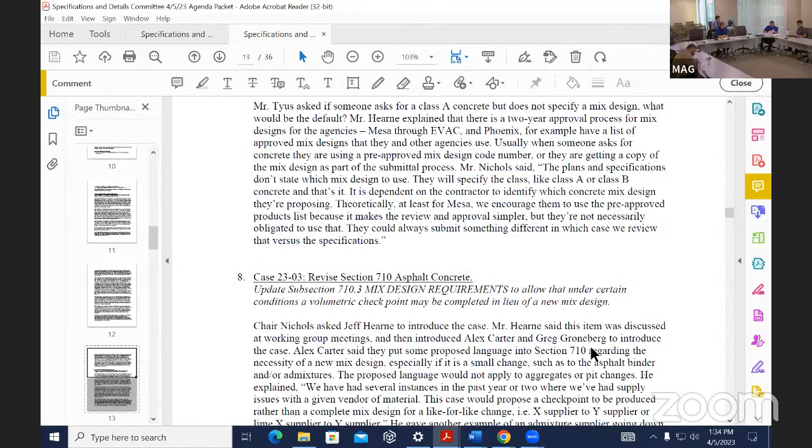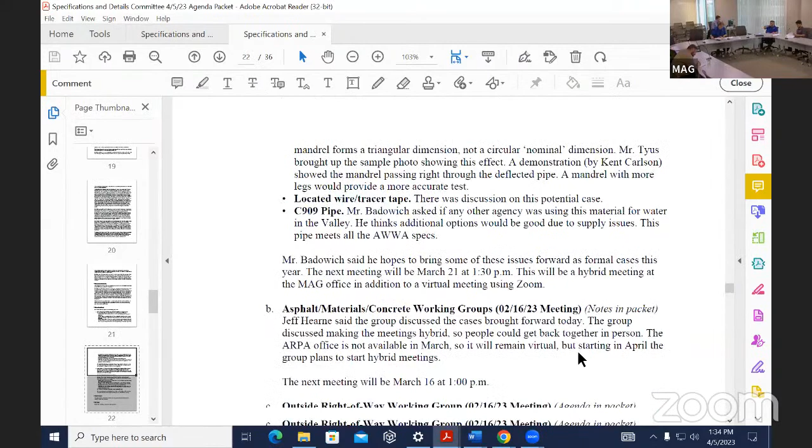We'll move on to agenda item number 3, the approval of the March 1st, 2023 meeting minutes. We can go ahead and scroll through those. And if anyone has any comments or modifications, after we get through those, we'll go ahead and discuss those. Otherwise, we'll entertain a motion on those minutes. We're very long this month, so it's going to be a long time scrolling. Okay, and of course, we didn't expect everyone to read those as we scrolled through them. Hopefully everyone had a chance to review those previously. Is there anyone with any questions or comments on the meeting minutes, or otherwise we'll have a motion for the minutes?

Okay, hearing no comments, is there anyone that would like to make a motion? Ryan, I'll motion for approval. Okay, thank you, Craig. Is there a second? Second. This is Roy. I'll second. Thank you. We'll go ahead and do a roll call vote on the minutes now. This is the minutes for March 1st, 2023.

Avondale. Is Avondale on yet? Buckeye, Buckeye's a yes. Chandler, yes. El Mirage, yes. Gilbert, that one is gone. That was canceled. Yeah, that's canceled. Gilbert, yes. Glendale, yes. Goodyear. It's good you're on. Maricopa County, yes. Mesa, yes. Peoria,

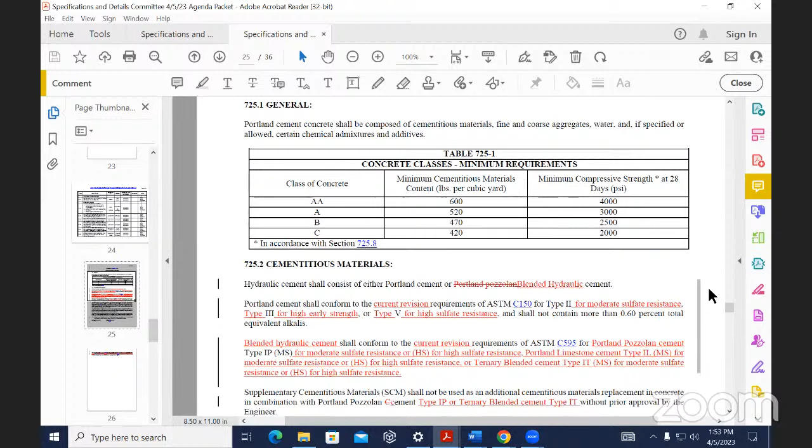Jeff, I've got a clarifying question for you. This last paragraph references C150 Portland cement of any type, or C595 type IL blended limestone cement. When those two types of cement are used, we're saying that up to 25% by weight of the minimum amount of cementitious material in the table may be fly ash, right? So 25% of that minimum cement material is allowed to be fly ash. That's correct so far, right?

Yes, and Ryan, that's the way it's been in 725 for a long time. Right. It's always been that way using C150 cements. We're just adding the 1L. We didn't add in the 1P, right? Correct. Because that has the fly ash.

So the way I read the second sentence, additional pozzolanic material, supplemental cementitious material in excess of the minimum Table 725-1 requirements may be incorporated into any concrete. So is there a restriction then on the amount of fly ash in the type 1P cement? Understanding it's potentially got some built in already, should that also not exceed 25% by weight, or does it not matter for that type? Right now, as written, with the first or second type you can only go up to 25% fly ash. With the third type, there's no restriction.

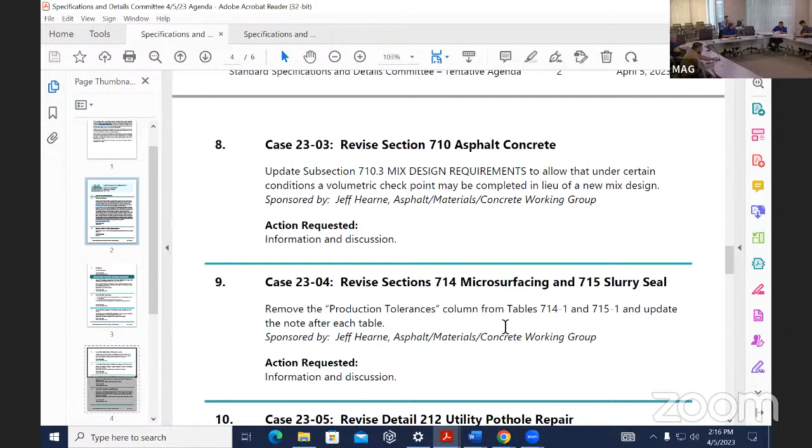We'll go ahead and move on to agenda item 8, case 23-03, revise section 710 asphalt concrete. This is to update subsection 710.3 mix design requirements to allow that under certain conditions, a volumetric checkpoint may be completed in lieu of a new mix design. Again, sponsored by Jeff and Alex. Are you going to speak on this one, or is Jeff going to take this? No, I'm turning it right to Alex.

Alex, you're on, buddy. Yeah, we presented this during the last working group for comment. It seemed well received. I have not received any comments or proposals for change in language. Jeff, have you received anything else by chance? No, not at all. I would turn it right to you if I did, Alex. Okay. So at this point, we're just seeking any comments or issues anybody sees with this change. We talked about it during the last meeting in depth.

I'll just add my thought here. I did reach out to the City of Mesa Materials Lab on all of these materials cases, actually, and I received very positive feedback for each of these cases, and they had no comments or concerns with any of the cases, including this one. So I think it's a good move in the right direction. Excellent. I appreciate that feedback. Thank you. Any questions from the committee or comments?

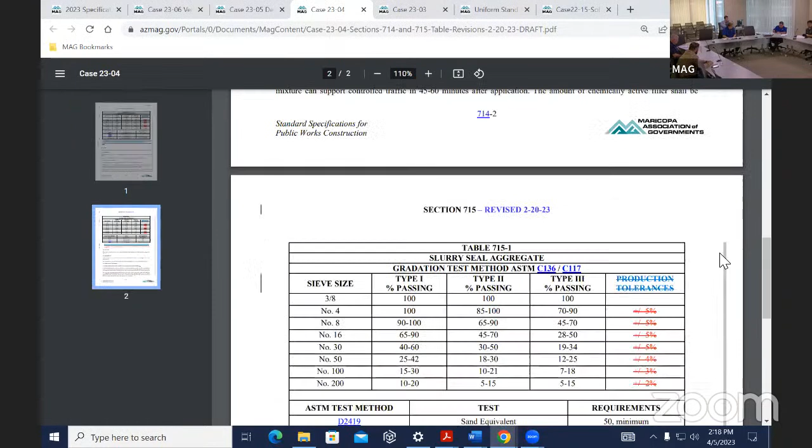Okay, hearing none, we'll go ahead and move on to our next agenda item then, which is case 23-05, detail 212, utility pothole repair. Removing ABC as a final backfill option for potholes and strike note 2, native soil for temporary potholes. Arvid. Thank you, sir.

So you've got the language that we submitted last month. We got some feedback from Warren's group. We responded to them in kind to reiterate what the purpose of this updating is for. Specifically it has to do with the backfill of the pothole when the pothole needs to be finally backfilled permanently. We cannot get compaction testing on potholes because a typical pothole is 10 to 18 inches and there's no way to get down in there and compaction test ABC.

So the working group decided it was best just to go with what the industry is typically doing right now, which is doing the half sack CLSM for final backfill. The native or the temporary backfill is an agency by agency decision. Certain agencies are allowing us to backfill with native and cold patch, knowing that that pothole has to be reopened many times to verify existing clearances between a trenchless installation and the utility. And we don't want to be going through CLSM every time. So we're using native and cold patch.

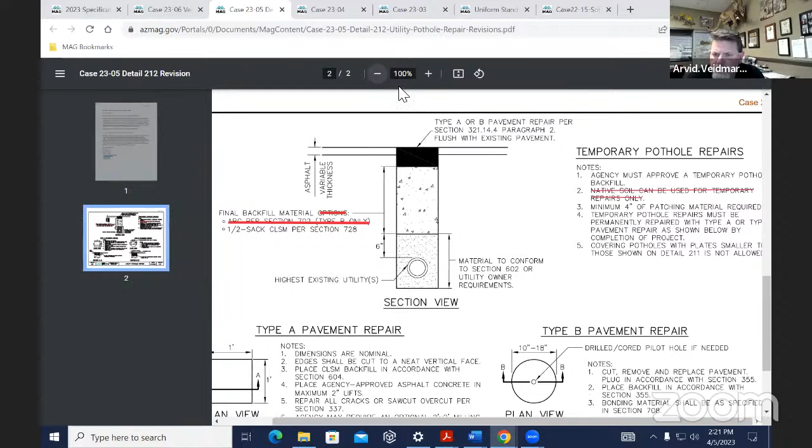We have the verbiage on the detail, and Gordon, if you can jump to the detail, you'll see that it makes the final backfill the half sack, and then under the temporary pothole repairs, agency must approve a temporary, hold on a second, I gotta move my camera, a temporary pothole backfill. Depending on what the circumstance is for the agency to be issuing the permit for that pothole to begin with. And this is primarily targeted towards the design potholing that takes place with all agencies in the preparation for a project eventually coming out to be built.

Or, we'll just use Southwest Gas as an example. Southwest Gas is going in and replacing a 4-mile gas system, and they need to find an alignment. And in doing so, they want to fill all those design potholes with CLSM because they don't know if they'll be using that alignment in 9 months or not. And we don't want to be leaving those design potholes temporary filled. We want them to be filled with CLSM, and then either have the coupon reinstated or do the hot patch pothole. So that's the overview.

And did I hear correctly? So you had these changes proposed at the last meeting. There haven't been any specific updates. You said there were some questions that you addressed, but that didn't result in any changes. There was a couple questions from Warren's team. Again, I'll read it to you. It says, if we're removing the native option for temporary pothole backfill, is there an acceptable default material option to be used instead, and possibly add note 1, unless otherwise specified by the agency?

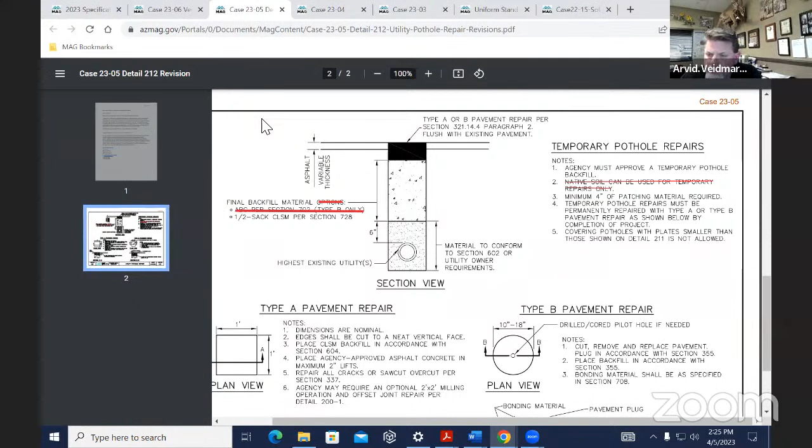Okay. Thank you. You're welcome. Any questions or comments? Okay, we'll move on. Thank you very much. Thank you.

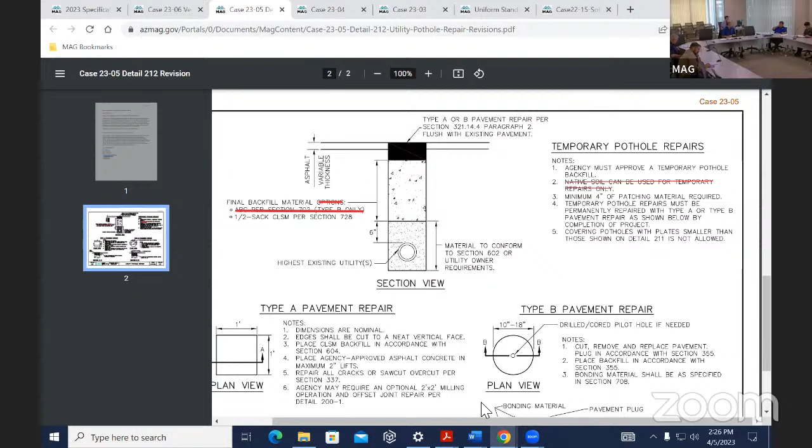I'm sorry, Mr. Chairman, I don't know how much longer we want to let this roll out there, but I think typically we give it a couple of meetings before we ask for a vote. Is that correct? We do. Yeah, I think it may be just a little bit premature. We try to get some voting done before we get to the last month when possible. So some of these cases that we haven't had comments on, I'd like to at least wait until next month and see if there's any final feedback. And if not, then maybe we start targeting a vote in June on some of these. Thank you.

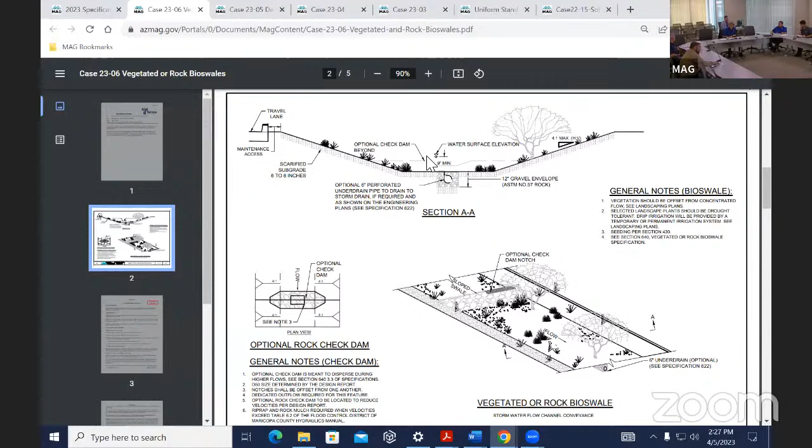Okay, very good. We'll go ahead and move on to agenda item 11, case 23-06, vegetated or rock bioswales. Proposed new bioswale detail and related specifications. And I'll just cut it short with my explanation on that and turn the time over. Is Bashir on now? No? Okay. Peter, you're also involved on this case? Yes, and I have to apologize. I got some comment. I did some revisions to be demonstrative on some of this stuff. Did you get those, Gordon? I emailed them a little while ago before I drove up here.

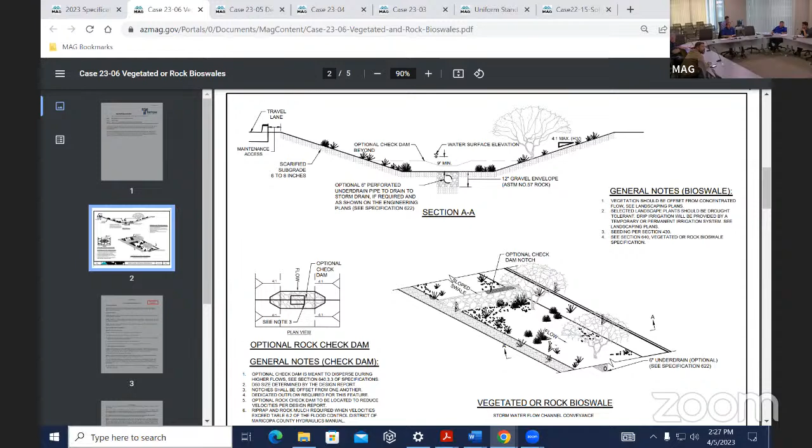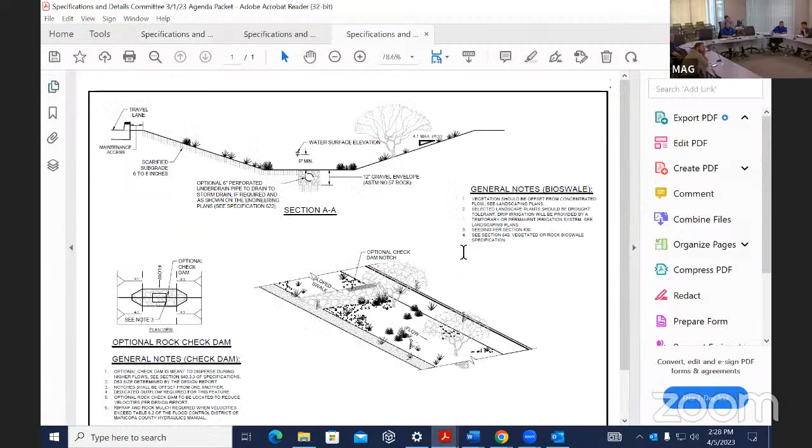Okay, so you don't have the email. So see if you can access that. That's my inability to get stuff done, because what we wanted to do is just go through some of the items that were brought up last time in terms of concept. This is our trial run one that's really pretty much outside of the existing Blue Book. So within that, there should be two emails from me. Yeah, there we go. So we can open that one up. And what I did was mark up one, and again, this was also a request by Eric. He wanted to see kind of a red line of what was talked about last week.

I wanted to show, at least conceptually, how we could make this look different, so you could differentiate between MAG specification versus the supplemental document, finally just calling it MAG supplements. So at the very bottom, I started putting just initials. And we can talk about that in the update of the working group. But I started adding just letters MS right now in front, just to give some kind of differentiation. And then getting rid of the word standard because of the discussions last time and going to the word supplemental, or supplemental specification or supplemental detail, as opposed to trying to identify this as the MAG standards. These are supplemental specifications and details.

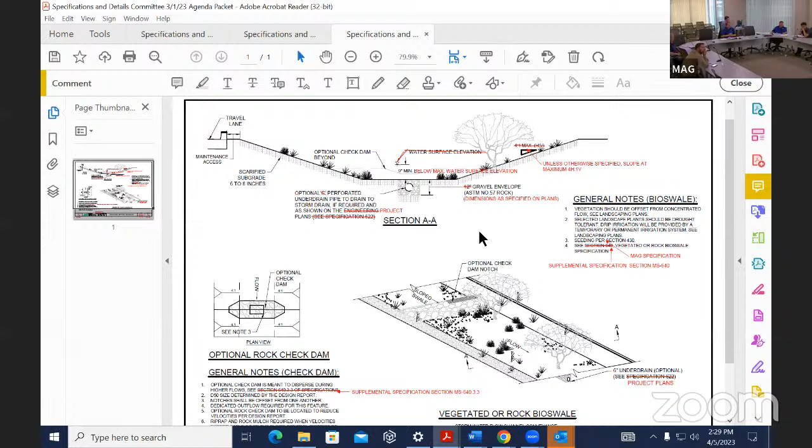So within that, I started just marking this up to show how that could potentially look on this one as our example case. So you can see where it's referencing an existing MAG, for example, it would actually say MAG specification section blank. That would be the notes under general notes. Maybe blow that up a little to the right side of the general notes section. Yeah, so this is one way I was thinking we could do that. So we've got seeding per MAG specification section 430. That would be very clear mentioning that.

If it's referencing a supplemental specification, it would say see supplemental specification section. And again, I'm using the letters MS because we haven't decided yet. MS 640 for vegetated bioswales. So starting to show that difference between those. And internally within this, I wanted to get that out to see where those changes could be done, see what kind of reaction, is that something that's more meeting what the committee would like to see as we bring these kinds of specifications forward.

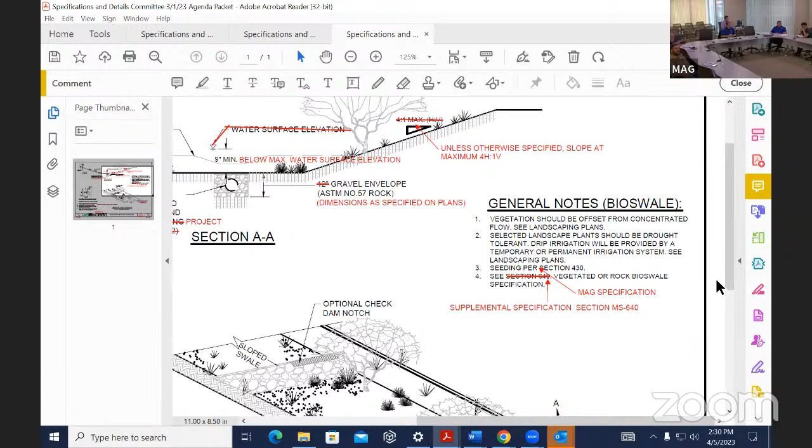I started making some other changes based on the notes and Eric's going to deal with those, but that's the real thing I wanted to bring up now. And the same thing on the standards themselves, the details. So, we could bring up a Word document. One of the two Word documents will work. Yeah, it's as good as either of them.

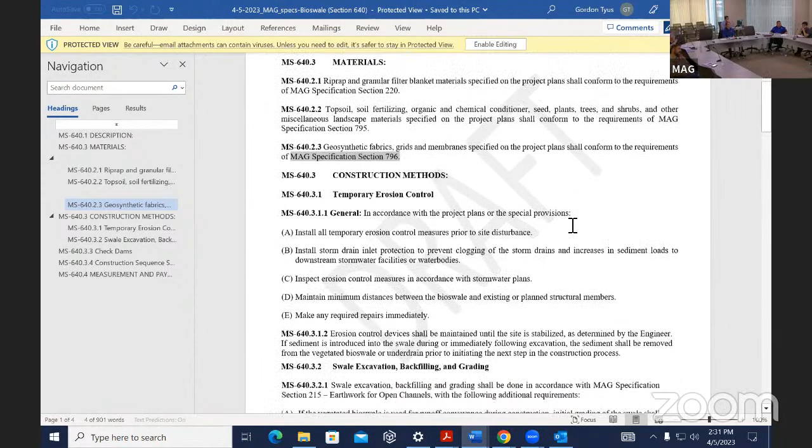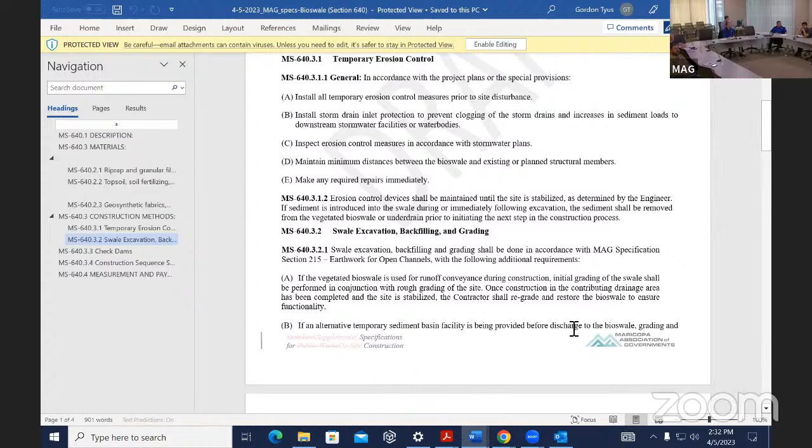At the bottom of the page, I even changed the heading a little, the bottom saying supplemental specifications. And this is that idea of public works or on-site construction. Trying to come up with this language difference so we don't mix the two up. So you see, it definitely looks different than a MAG specification. And again, it goes through the rest of it. I didn't want to change too much.

Again, you can see the words MAG specification, or if it's a supplement, it would actually have that. So I'm kind of throwing that out as a way to start developing these and making them look different. So I'm looking for some feedback, especially on that. I don't think we received any detailed feedback other than the discussion we had last time, which Eric is still incorporating. But we need to come up with format as much as anything else. So looking for feedback on it.

Peter, the one thing that pops out to me is when we start putting supplemental in there, some of the other cities have their supplements. Could there be a chance we could start confusing the City of Avondale supplements with the supplements for MAG? So part of the idea was always keep the word MAG in front of it, MAG supplemental specification, as opposed to City of Tempe or City of Mesa and so on. And that was the hope, that we'd always keep the acronym MAG in front of the supplemental word. Okay, which identifies where it's actually coming from. Yes. I think that's a great question and comment.

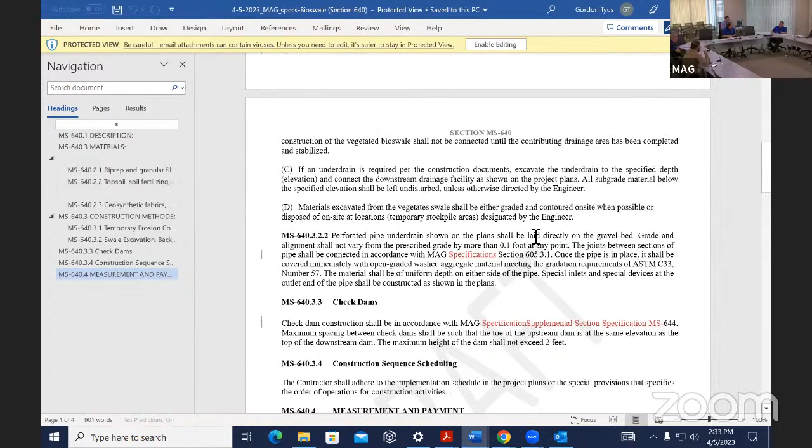And I think I had sent an email with a whole slew of thoughts on wording. Did that go to Eric and Basher? I don't remember who I sent it to. Okay, I'll have to look. It was on my emails a month ago, but I do like that. I'm kind of reiterating, I think I made these comments in the last meeting as well, but I personally think we want to avoid using the word standard for these documents. And so I think that's a move in the right direction.

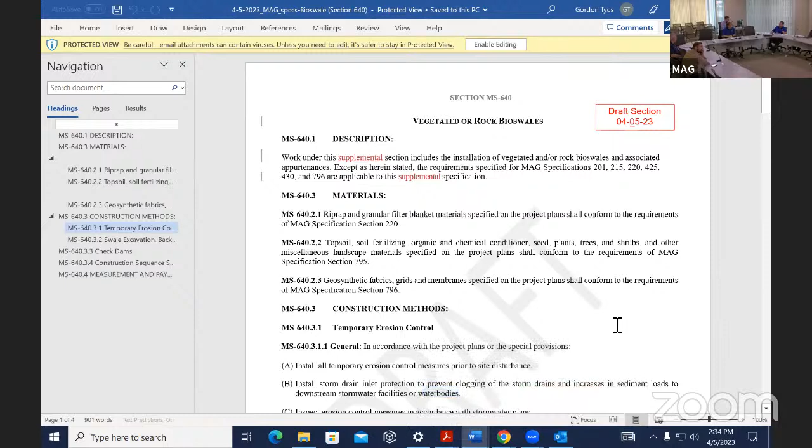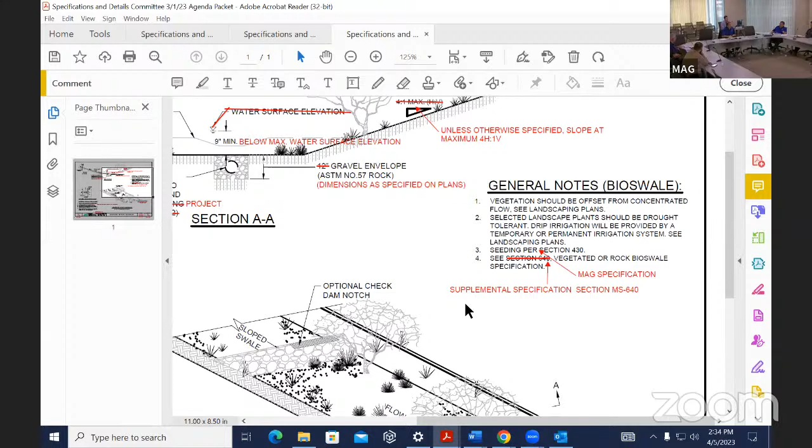Meaning standard details and standard specifications have always referenced the right-of-way document. Correct. And so I want to avoid using the word standard details or standard specifications for these. And also part of that stems from the idea that perhaps some of these details that are being generated are more of an example detail as opposed to a standard detail or a typical detail, or there's some variability to them that exists inherently as opposed to the standard details, which are pretty well standardized for that particular item.

Like the bioswale, the depth may vary, the width may vary, the rock material may vary, everything about it may vary. So it's not a standard detail as much as it is a common detail or typical or sample kind of detail. A guideline. A guideline, right. So we'll get those comments incorporated for the next one.

Eric had asked me, and I really couldn't get around to it until literally this morning. Yeah. I'm trying to deal with that. So I'll get him red lines. I'll incorporate the City of Mesa comments within that also. And those were just on form. I don't have an answer for you. I had a lot of thoughts, and they were suggestions also, but I think this moves in the direction that I was thinking myself.

Yeah, and during the working group meeting, I also emailed, you'll have a second email from me, Gordon, that has some revisions to the draft foreword that talks about similar language like that and some of the intents we talked about. We can talk about that more. So I wanted to get this out right now, and then again, Eric, the city deputy, will be able to make some of the more detailed changes for the next meeting as we're going through. But we got to start figuring out the format.

Okay, let's have some feedback from the committee. Peter, I don't want to throw a complete wrench into this, but here's a thought. Instead of supplement, I mean, these have been, for as long as I've been coming here, outside of right of way; you've been working on this for many years. Could we look at possibly, instead of a standard detail, call it an outside of right of way detail? And maybe put that in the definitions at the beginning of the document as an OROW? And again, I think we need to talk about how we want to do the acronym in front.

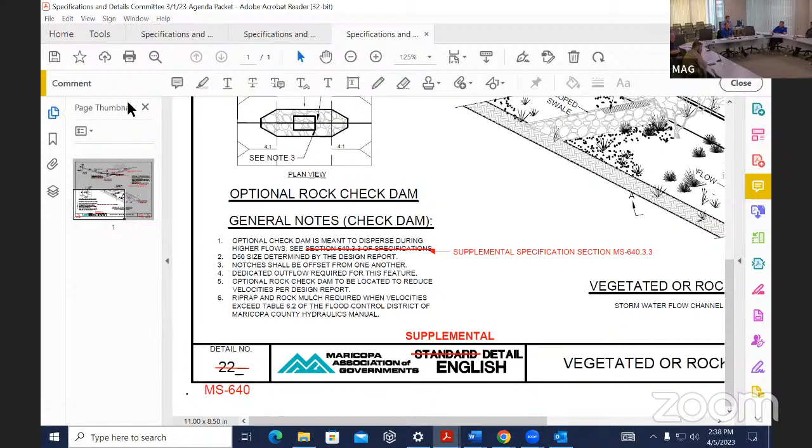What about instead of outside of right of way, just calling it a non-right of way detail? Kind of an NROW. I don't know. If it's not in the right of way, it's non-right of way. That could mean private, on-site. Yeah, the on-site, like I said, in our world could get a little confusing. I agree. Why don't you think about it? We'll discuss in a few minutes when we get to the discussion for the working group, because it's going to come up again. But again, I wanted this out there as we get these ideas. This is great. We're going to have some more cases coming up, so we got to get on top of this fairly quick. Thank you.

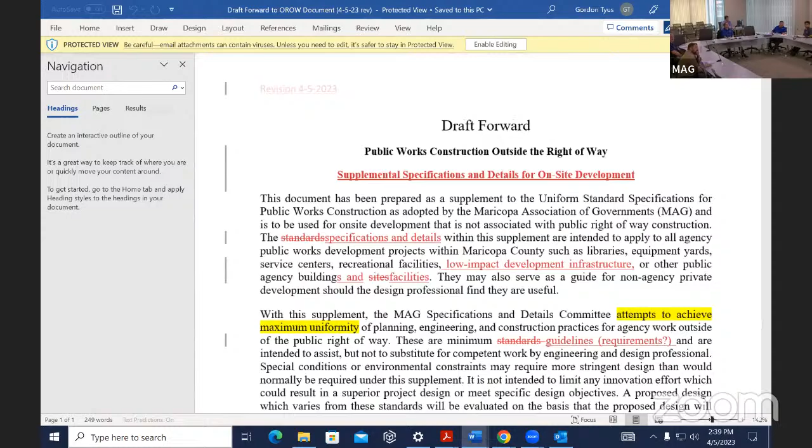I think we're already talking about this now. If there's other feedback or comments, we might as well hear them now. Yeah, if we want to just jump into that, there's the first email I sent you earlier that's got the revision to the draft foreword, and it's a bit more concise in terms of the wording. There it is. Yeah, open that one up. So based on the conversations last time, I kept the top one, public works construction outside the right of way. And then I added the other line we talked about, which I don't know if we need both, supplemental specifications and details for on-site development. Maybe there's a blend of these two for the final title.

Language changed in there, as we said, was get rid of the word standard. We'll call them specifications and details within this supplement, intended to apply to all agency work. I added the low impact development infrastructure because it seems like a lot of these are going to be directly related to that, and changed building sites to just buildings and facilities, trying to make it more uniform. Warren had asked last time to make sure there's an emphasis on the purpose, or the intent, being uniformity.

I highlighted that because we did have that in there. I'm not sure if maybe we want to have something more strongly worded or bring it farther up. And then that term of standards versus, and you can see the words guidelines, requirements, a selection of language in there with that same intent of not trying to establish these as a standard. One of those two words, maybe requirements is too strong, maybe guidelines is too soft, but at least there's some language we can look at there.

So the intent is to try to get it toward those things. This is going to lead into all of the standards no matter what, either specification or detail. It's going to be our preface to the whole thing. So again, Gordon, you'll be able to get that out now that I was very, very tardy on getting it to everybody. Yeah, after the meeting, I'll post these documents to the meeting webpage.

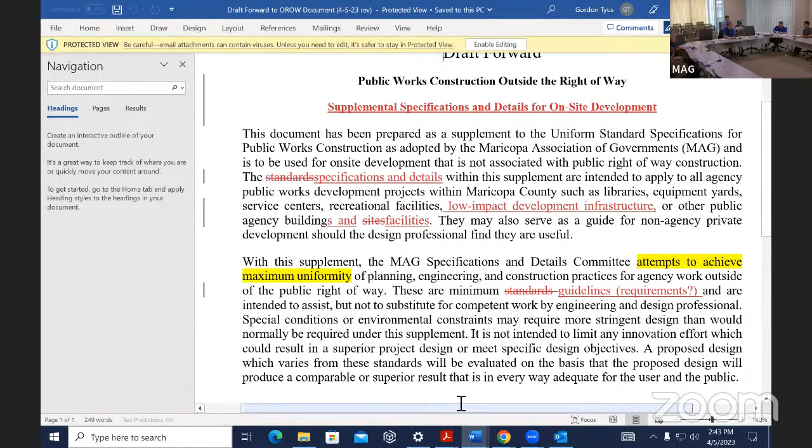Okay, so Gordon indicated he'll get this information posted for everyone to review in more detail, and we'll have an opportunity to come back in the next meetings or working group meetings and provide some good feedback and hopefully start moving this into a direction where we can implement it. Yeah, because at the next MAG meeting, we're going to be introducing another case. So as these start moving forward, we're getting on the front end of it this way. Thank you. Okay, any final questions or comments specifically on case 2306, the vegetated or rock bioswales?

Okay, we'll move to agenda item 12, potential new cases for 2023. There was one in the agenda packet on section 610. Is there someone that wants to speak to that one? This is one that Warren White sent me earlier this month as a possible change. I don't know, Rachel, if he clued you in on it at all. The only thing I know is what he sent me and what you see here. I've received that same email. He said if there's any questions about it, feel free to email him, or I can pass on my meeting notes to him.

Okay, and that's fine. It's not a case for this particular month, so it's listed under our potential future cases. So we'll look forward to having Warren potentially introduce this as a case. It looks like it has to do with gaskets on water lines. So we'll look forward to that in the future. Are there any other potential new cases that committee members would like to discuss at this time?

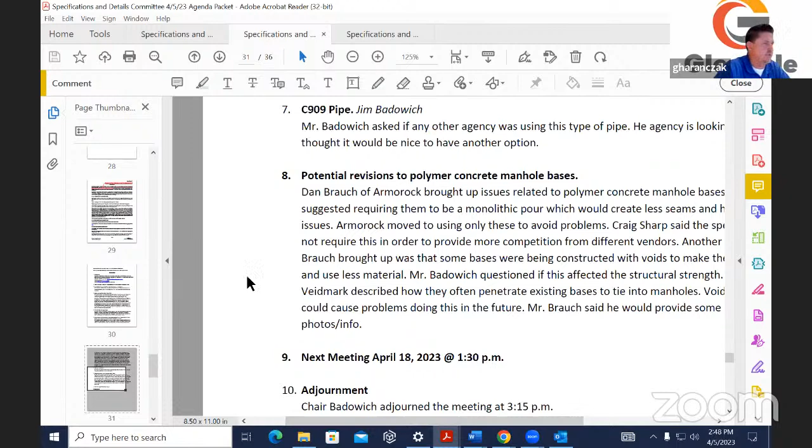And then I discussed the C909 material option. Other agencies, if they're still online, is there anybody using this C909 pipe for water line? Maybe for water can adjustments, water valve adjustments, but we're all ductile iron in Glendale, unless it's sewer where we stick with the SDR line of pipe. Yeah, the C909 is interesting because it's denser, but apparently it's a little lighter, so you can get away with thinner walls. It's supposed to be just as strong. It's used a lot in California because it's good for seismic loading and shear. The reason Avondale was looking at it is because of the shortages with supplies on the regular C900. Apparently this is more readily available.

One point on that, we do a lot of reviews for the power utilities, and this is on the private side. We're seeing where they're crossing through power easements that that material is being used now, in terms of their capacity to be underneath the heavy SRP equipment, for example. Oh, okay. Is that 909 for pressurized water or gravity feed? It's for pressure water. Okay. That's what I assumed. That's where we've seen it, on the water side. All right, thanks for the feedback.